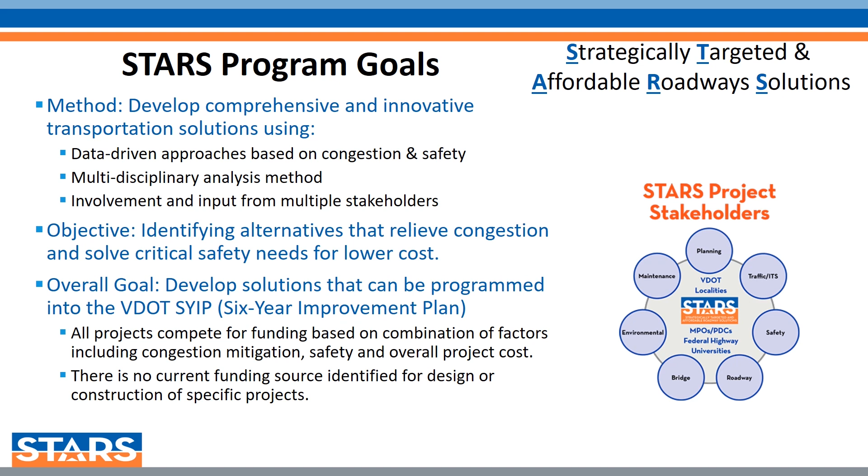The ultimate goal of the STARS program is to identify corridors with congestion and safety issues that can potentially be improved with lower cost, affordable roadway improvements. Upon completion of the STARS study, projects will compete for funding based on a combination of factors for potential inclusion into VDOT's 6-year improvement plan. Note that there is no specific funding source for specific STARS projects for either design or construction. Each project must compete for funding as part of VDOT's prioritization system.

The study area for the project consists of the 1-mile section of Russell Road between I-95 and US 1, as well as a 1-mile section of US 1 itself. On this section of Russell Road, there are 3 signals at the I-95 interchange and 2 unsignalized intersections at the US 1 interchange. Within the study area, Russell Road is a 2-lane roadway except at the I-95 interchange. It is posted at 35 miles per hour and carries approximately 12,000 vehicles per day.

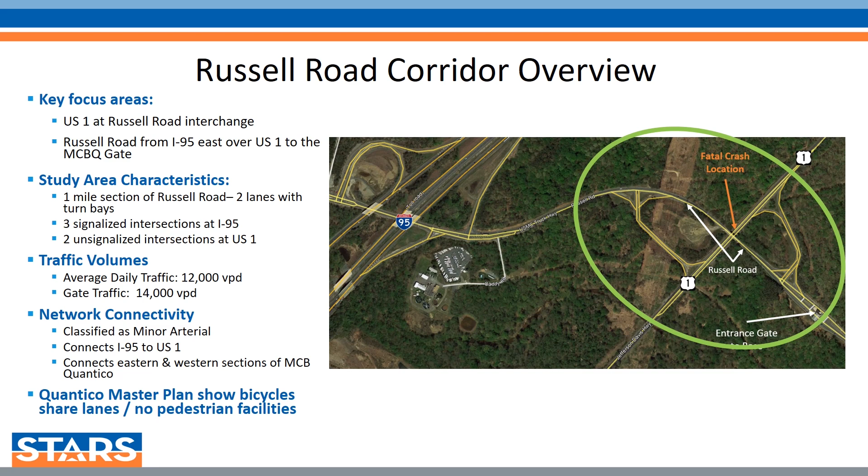As identified in the Quantico Master Plan, future plans show bicycles sharing lanes with vehicles similar to what is provided now. In addition, US 1 was examined as it affects flows on Russell Road. This analysis along US 1 included examining the Corporate Drive signalized intersection located 1/2 mile south of the US 1 interchange. Although carrying a relatively low 16,000 vehicles per day on a 4-lane section, high levels of peak hour demand result in northbound delays in the AM and southbound delays in the PM peak on US 1.

The purpose of the Russell Road at US 1 interchange study is to evaluate safety and operational conditions in the area, including and surrounded by the interchange of US 1 at Russell Road. It is located immediately west of the Russell Road gates into Quantico. In the initial project discussions, 4 specific project needs were identified to address, including improving overall safety and reducing crashes,

reducing overall congestion and delays, improving operations at the existing interchange to facilitate flows into Quantico, especially in the AM peak where police control is now required during certain peak hours, and finally to improve flows and maintain access into Quantico and between the western and eastern sections of the base during periods of severe congestion on I-95, when substantial volumes of traffic divert onto US 1, disrupting flows on both US 1 and Russell Road.

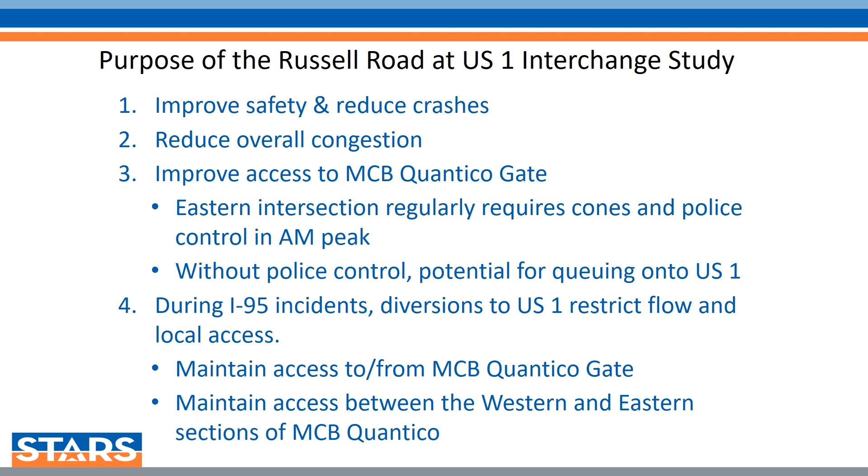In defining the study purpose, it is also important to identify what is beyond the scope of improvements that can be considered as a STARS project. As the acronym states, the A stands for Affordable Solutions. Larger, more expensive projects, such as a widening of I-95 or US 1, are not considered. These projects are regional, high-cost projects beyond the scope of STARS.

In the early stages of this project, improvements to the Corporate Drive at US 1 signalized intersection were also examined, but it was quickly determined that even with substantial access restrictions, US 1 would need to be widened to 6 lanes, which would be beyond the scale of the STARS program.

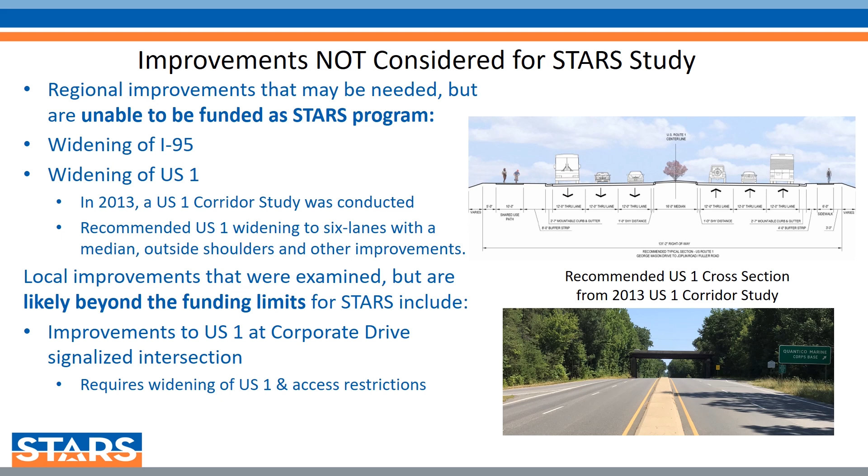The primary focus of the current study is the Russell Road at US 1 interchange. As currently configured, there are low-speed two-way roadways serving as ramps in the northeast and southwest quadrants. The intersections on Russell Road are unsignalized and result in high levels of delay, especially for traffic needing to turn left onto Russell Road. As volumes increase, this delay will continue to increase and ultimately result in traffic queuing back

onto US 1. US 1 is a higher speed 4-lane facility posted at 50 miles per hour in the interchange area. Low speed right in and right out turns are provided to access the existing ramps. In addition, there is a security gate providing critical access to Quantico just east of the interchange.

There are also some environmental constraints considered as part of our analysis. The northwest quadrant is Locust Shade Park and would require detailed study and potential mitigation if construction were to occur in that quadrant. In the southeast quadrant, there are also some wetlands as well as a possible archaeological site that would require study.

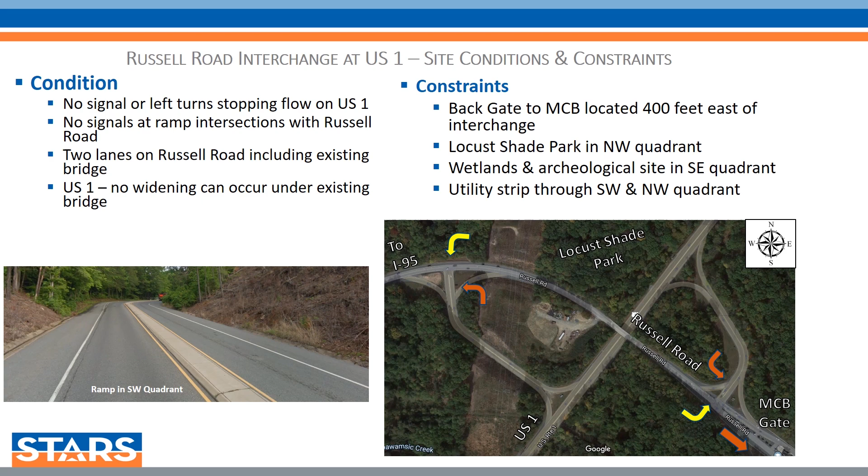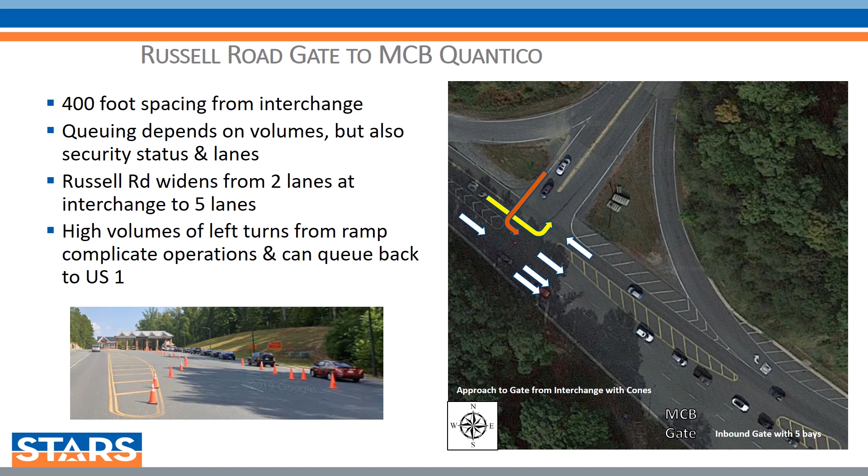As identified earlier, a key purpose of this project is to improve access to Quantico, specifically at the Russell Road security gates. In addition to congestion relief, a key reason is that the existing intersection east of US 1 requires manual traffic control during the AM peak on high volume days. Without the police control, queuing of left-turning vehicles from the ramp can extend back to US 1, introducing potential for safety issues. As shown here, the key conflict in traffic flow is the high volume left turn from the ramp bound for the gate.

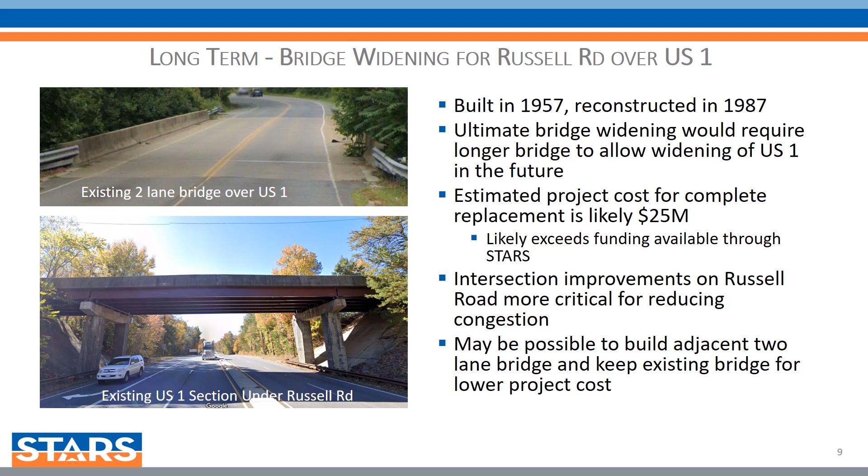A key constraint in the interchange area is the existing 2-lane bridge over US 1. The existing bridge was constructed in 1957 and reconstructed in 1987. Widening of the bridge is not an option. Instead, when the bridge is replaced, it will require a substantial lengthening of the bridge to allow for the provision of a future widening on US 1 with extra lanes, a median, shoulders, and pedestrian accommodations. The estimated $25 million cost will likely require funding separate from the STARS program. Note that the possibility of constructing an adjacent 2-lane bridge as a lower cost option is being evaluated.

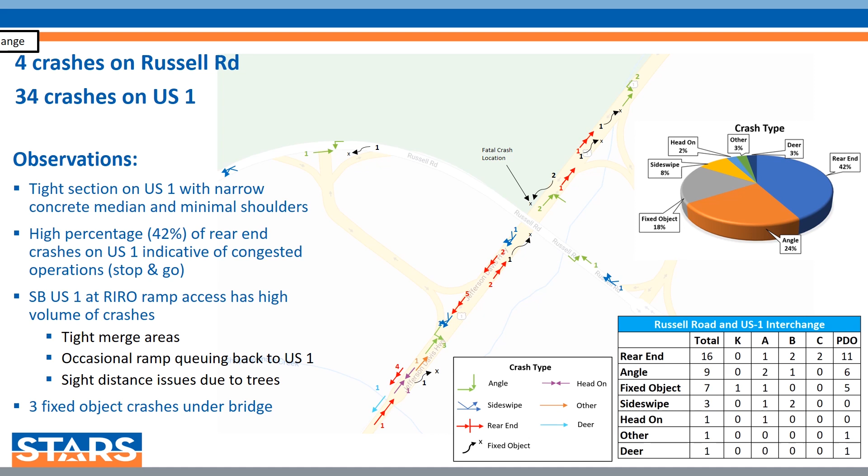As of this presentation, the study has made steady progress through the collaboration of the stakeholder team, including participants from VDOT, Prince William County, Stafford County, and Quantico. Existing conditions have been analyzed, and future growth and traffic forecasting have been performed. The study team has screened several alternatives to determine those that are most viable to bring to the public for consideration, and those options have had preliminary cost estimates and sketches developed.

This process originally looked at 11 options to improving the US 1 interchange. In the initial screening process, however, one of the key findings was that the addition of traffic signals on US 1 will result in higher congestion and delays and will likely accelerate the need for widening US 1. After review of traffic operations impacts and preliminary costs, 2 options were selected for further study. One option is a Russell Road widening with the addition of traffic signals at the ramp. The second option is similar in that it requires widening of Russell Road and traffic signals, but it also includes a new one-way ramp in the southeast quadrant.

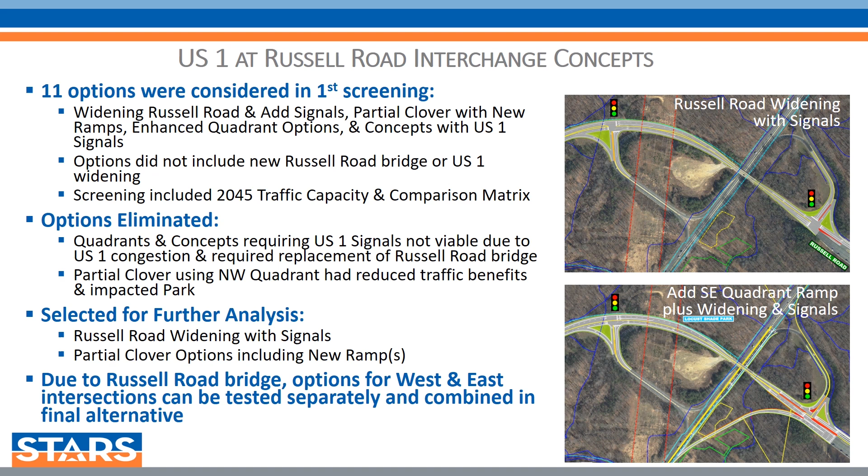As noted previously, replacement of the Russell Road Bridge will be expensive and likely cannot be completed from a funding perspective at this time. Given this constraint, the analysis is focused on examining two specific locations, the western intersection and the eastern intersection separately. The assumption in this analysis is that each will taper down to match the existing two-lane bridge over US 1. The different western intersection options can be combined with different eastern intersection options interchangeably.

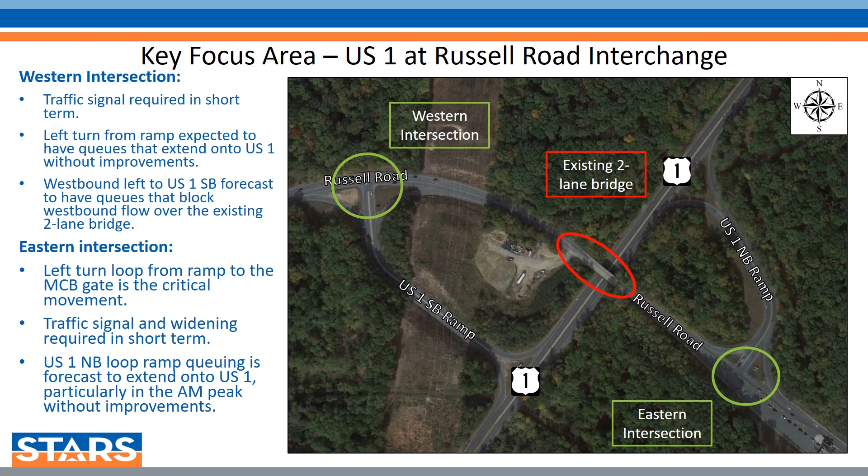Both intersections are currently unsignalized but will require signalization in the future. For both intersections, capacity is a key concern, as well as the queuing of left turns from the ramps onto Russell Road. In peak period conditions, these movements can back onto US 1. Note that operations at the eastern intersection are more congested, primarily due to high volume left turns from the ramp bound for Quantico.

The western intersection is examined first. For this location, a no-build scenario, representing no change from existing, is compared with two widening alternatives. In reviewing the alternatives, there is one key concept that must be understood.

In evaluating traffic, capacity is measured using a measure known as level of service, or LOS. It ranks intersection operations on a scale from A to F. Just like in school, an A is very good operations with minimal congestion. On the other end of the scale, level of service F represents high levels of congestion and very poor operations.

In general, for urban areas, level of service D is considered acceptable or passing. Level of service E indicates maximum capacity has very nearly been reached, and level of service F is failure, just like in school.

The no build for the west intersection assumes all conditions remain similar to today. Most critically, this means that the intersection remains unsignalized. Looking at both existing 2020 volumes and 2045 volumes, the intersection operates at level of service F.

Unlike traffic signals, however, where all vehicles share some delay, at an unsignalized intersection, the lowest priority movement incurs the majority of delay. In general, this is the left turn from the ramp onto Russell Road since it has a stop sign. This is forecast to result in queues backing onto US 1, causing both congestion and safety issues for through vehicles on US 1.

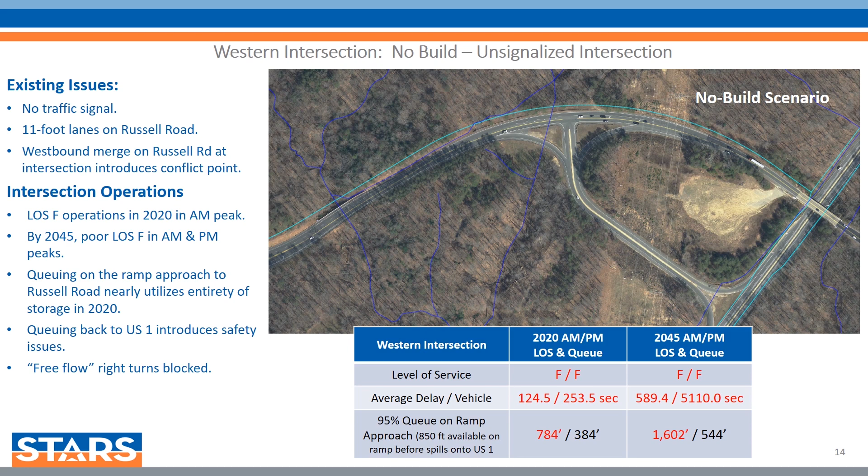Alternative W1 incorporates minimal intersection improvements but does include the construction of a traffic signal. By 2045, this improvement also results in level of service F operations, but because the delay is shared between movements at the signal, the impacts to flow are different. While queuing on the ramp back to US 1 is reduced by almost 500 feet as compared with the no build, it still queues back onto US 1 in the AM peak.

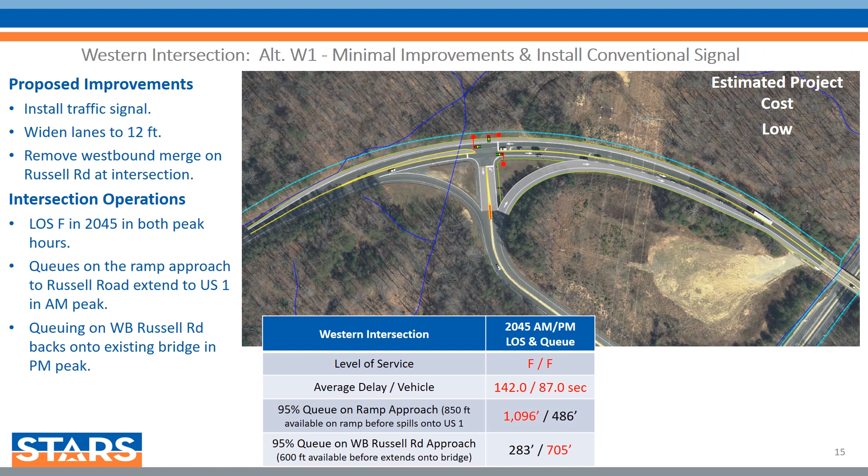In addition, the westbound through movement is forecast to extend back onto the Russell Road Bridge over US 1, potentially impacting flows from the eastern intersection. Alternative W1 does address congestion and queuing in the short term, but would need to be improved before 2045.

Alternative W2 includes a widening of Russell Road to 4 lanes and the addition of a traffic signal at the intersection. Alternative W2 substantially reduces congestion with level of service C operations in the peak AM period. From a safety standpoint, queuing on the ramp back to US 1 no longer occurs. Note that one adjustment to the intersection layout was the elimination of the free flow right turn from the ramp. The widened intersection allows for this to occur without queuing.

The removal of the free flow lane allowed for 2 through lanes eastbound through the signal to then safely taper into the 2-lane bridge. Note that this solution carries the widening of Russell Road west to match into the 4-lane section at the I-95 interchange. In addition to simplifying operations for drivers, it provides a second lane for traffic traveling between the eastern and western sections of Quantico, even if trip diversions from I-95 have congested Russell Road and the lanes turning onto or off of I-95.

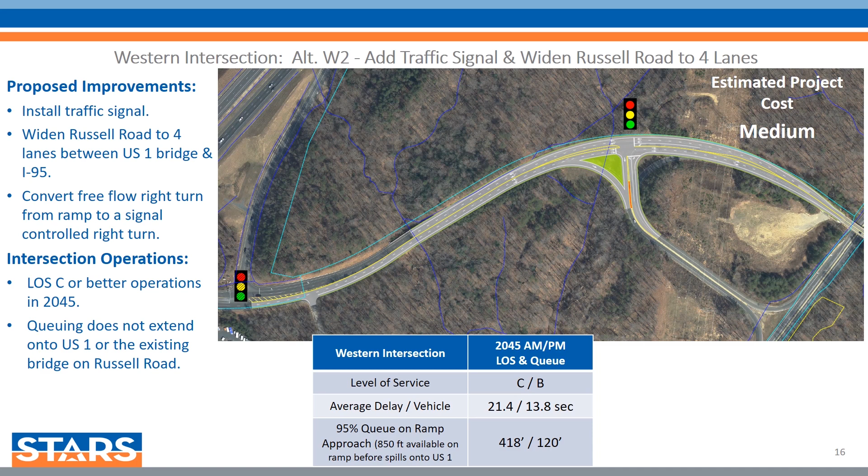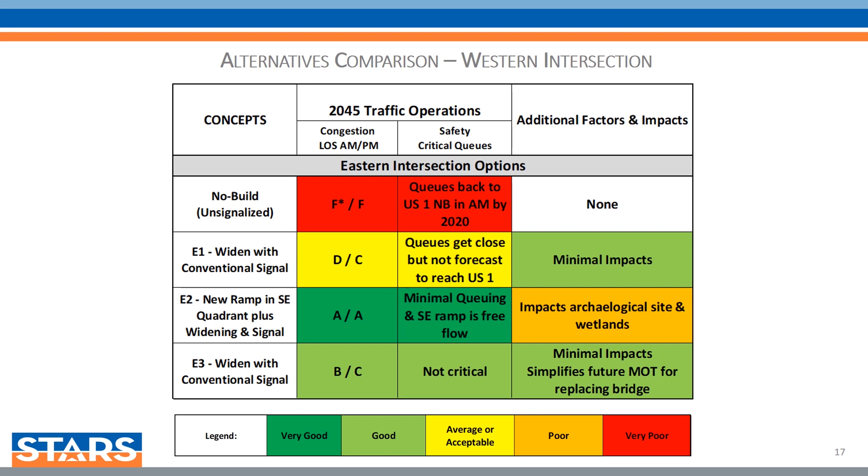The eastern intersection is examined in the next set of slides. For this location, a no-build scenario representing no change from existing is compared with 3 widening alternatives. As with the western intersection, this analysis utilizes level of service as a key measure of congestion. Just remember, just like in school, an A is good and an F is bad.

The no build for the east intersection assumes roadway geometrics remain similar to today, although future traffic volumes will be higher. It should be noted, however, that this analysis assumes that traffic is operating without police control, as occurs occasionally already in the AM peak. The key issue with the no build is that the eastern intersection remains unsignalized.

As shown under existing conditions, the intersection already operates at level of service F in the AM, with queuing extending onto northbound US 1. By 2045, left-turning vehicles from the ramp will essentially have no gaps to turn left into the base, resulting in queues on the ramp extending upward of a half-mile onto US 1. In this scenario, police control would likely be required to provide access into the base from the ramp. Also note that level of service F operations would be anticipated in the PM peak, although with less delay than in the AM peak.

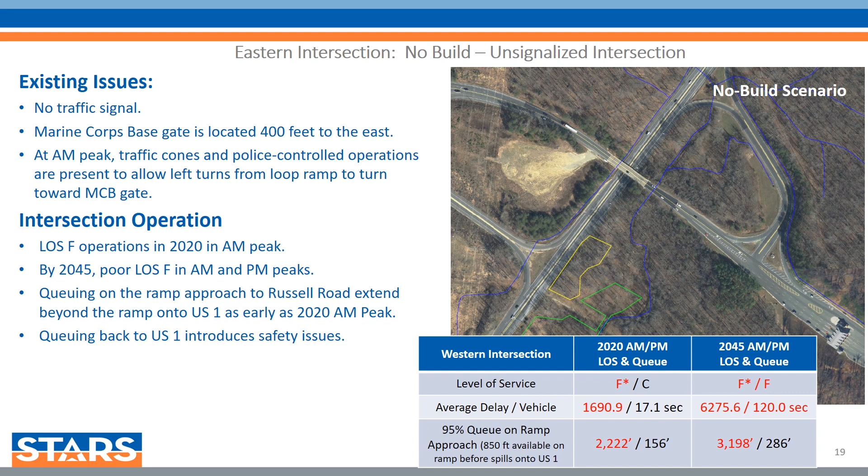Alternative E1 includes a widening of Russell Road to 4 lanes at the eastern intersection. It also widens the ramp to include a dual left turn onto Russell Road toward the gate. In general, this improvement improves operations to level of service D in the AM peak and level of service C in the PM peak. Queuing on the ramp still occurs, but is not anticipated to extend back onto US 1 during typical weekdays. It is important to note that this includes a conventional traffic signal that requires all movements to stop at some point to share the intersection.

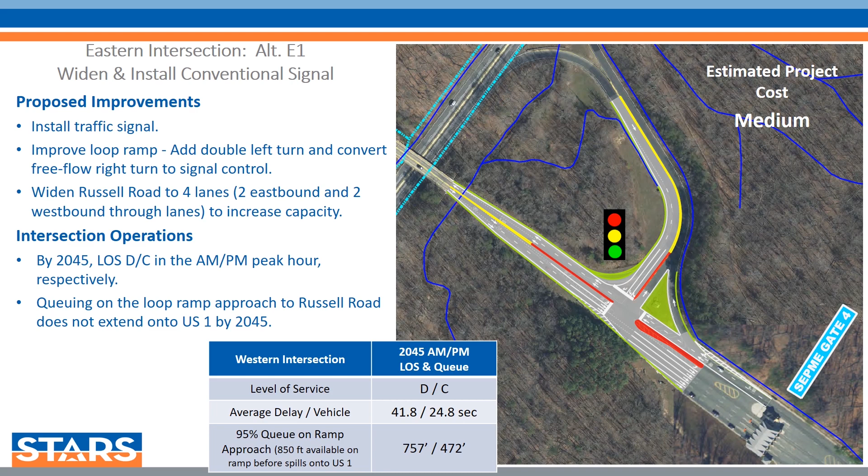In addition, if gate operations are causing queues separate from the intersection, and these queues back into the intersection, the left turns from the ramp would incur the most delays, which could accelerate queues back to US 1. Nevertheless, this alternative does meet the traffic capacity needs of the intersection.

This slide shows Alternative E2, which features a new one-way ramp in the southeast quadrant. This ramp allows for traffic from US 1 northbound bound for the gates to exit US 1 and proceed to the gates without stopping. The left turn from the existing ramp and the delays for that movement are eliminated. The traffic signal operates at level of service A, with the only conflict being left turns onto US 1 northbound crossing westbound traffic from Quantico. By reducing turns at the intersection, conflict points are reduced, resulting in safer operation.

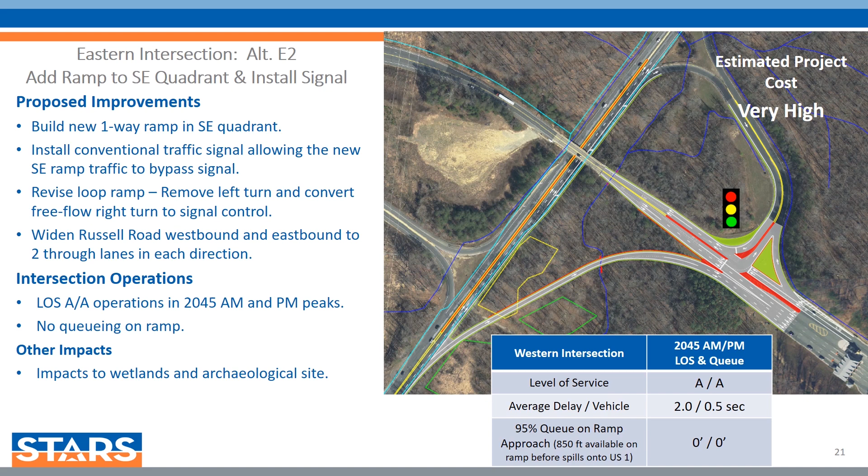Due to new construction, however, some impacts to a potential archaeological site, as shown in yellow, and wetlands in green would need to be addressed. Also note that this improvement is much more expensive and likely exceeds the cost for a STARS type improvement.

Alternative E3 is an attempt to implement the improved traffic operations of Alternative E2 with a lower cost approach similar to Alternative E1. Instead of installing a conventional traffic signal requiring all movements to stop at a signal, this operation incorporates a green T solution. By shifting the eastbound Russell Road approach further out, it is possible to protect the left-turning traffic from the ramp, allowing them to flow at the same time as the throughs on Russell Road.

A signal is still required, but a high percentage of traffic entering the gate from Russell Road do not need to stop. Overall operations improve to level of service B in the AM and level of service C in the PM peak. Queuing is not anticipated on the ramp back to US 1. This alternative does require more construction than Alternative E1 and has a slightly higher construction cost, but has definite traffic advantages.

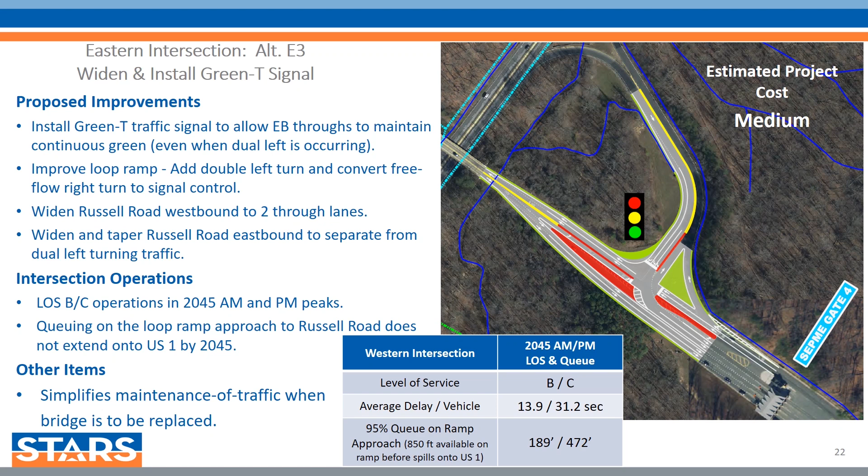This slide provides a comparison of the potential improvements to the eastern intersection. Using the same color scheme as the western intersection, the comparison looks at traffic operations, queuing and safety, as well as impacts or features of each alternative. As would be expected, there are trade-offs between alternatives, especially when considering likely costs. Although Alternative E2 provides the best traffic operations, it is likely at a much higher cost than the other alternatives due to the new ramp.

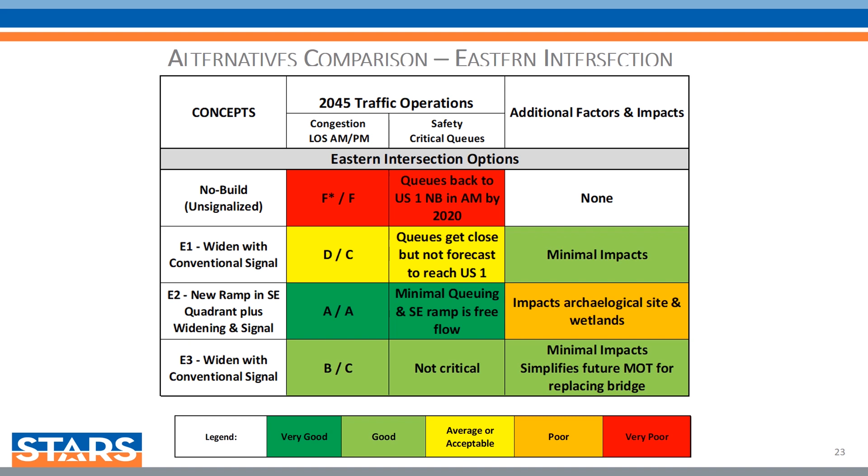The next steps in the study process start with you. A MetroQuest survey to allow for public input on issues and priorities within the study area, as well as on the current alternatives, is available via hyperlink on the study website. The study website is located at www.virginiadot.org/RussellRoadStudy, with no spaces in Russell Road Study. We encourage you to give as much feedback and input as possible. Your comments and suggestions help guide the decisions of the study team on what alternatives should be selected and what features of those alternatives should be revised or reconsidered.